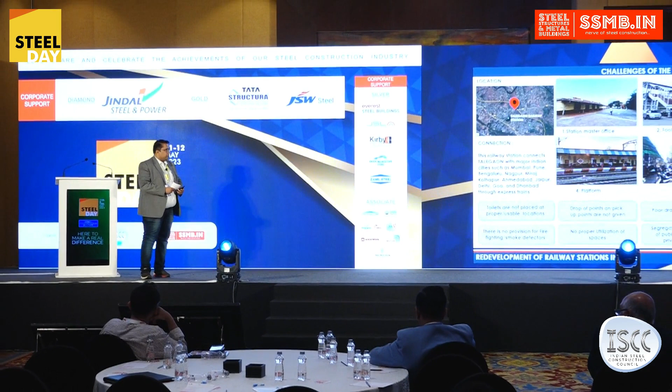So, Talegaon is one of the busiest stations in Pune. When we visited the station for site survey, we were pleasantly shocked to note that the railways themselves did not have the drawings of the station and needed us to survey the whole station area before we got started. The platforms and its buildings, as seen in the photographs, are dated and haphazardly developed.

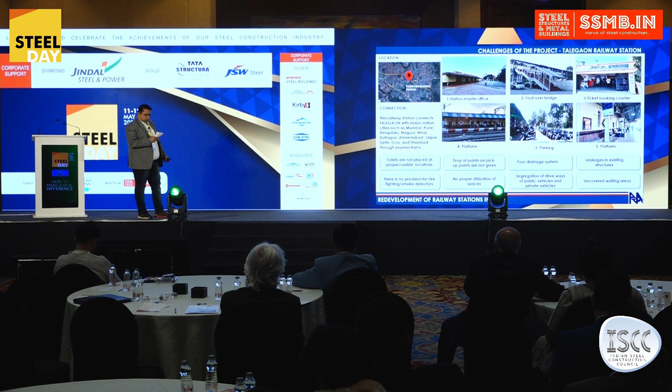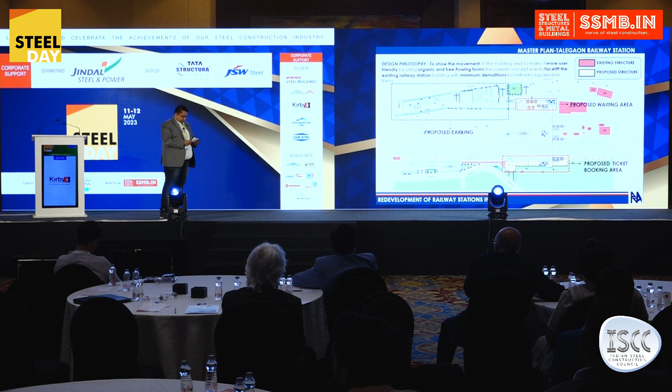So this is the first option that we proposed and presented to the railway team. A blend of flowing forms, new and dynamic materials, with a proper landscape that would complement and tackle the various greenhouse gases that will be released due to the continuous movement of vehicles and cabs and rickshaws, etc.

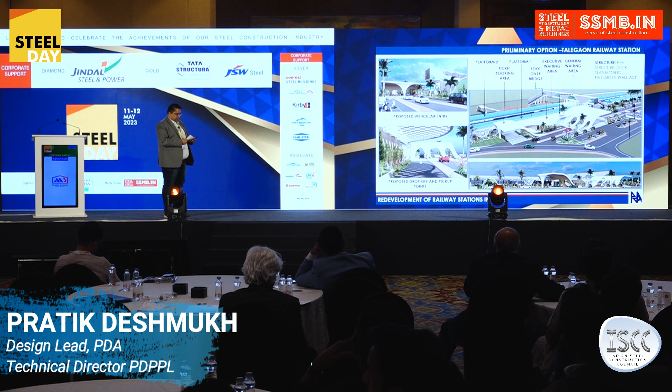We wanted to use the blend of various steel components to create a free-flowing design to change the myth that with steel, one cannot create dynamic forms. After the initial presentation, we were advised that we should stick to the DSR items and not have many non-standard or NS items. We were also informed that the space we were showing in the front where we have the access roads does not belong to the railways. So we had to rework the whole design again.

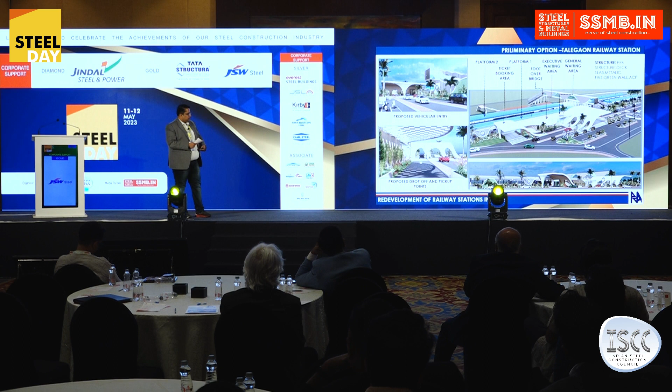So we went back and reworked the whole design with the compact space allotment that we had. And because of the timelines, the railway said that we want to finish these jobs before the next elections, which is about 8 months from today. So we went back to the conventional forms, where execution would have been much simpler and much easier.

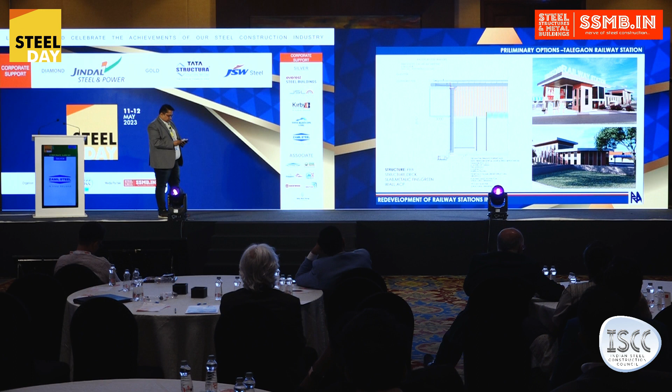Here we have used the primary steel for columns and beams. The facade, though depicting an RCC building, is in fact a combination of cement board cladding with texture plaster to mimic exposed brickwork. We have designed it as a double skin facade which connects to the roof plenum, which has turbo ventilators on the top that shall be used for heat dissipation.

The roof and the wall junctions are covered in ACP to facilitate maintenance of the gutters, as well as create an appealing box fascia for the building to cover the metal roof and its slope on the top.

6 minutes over. I'm just almost done.

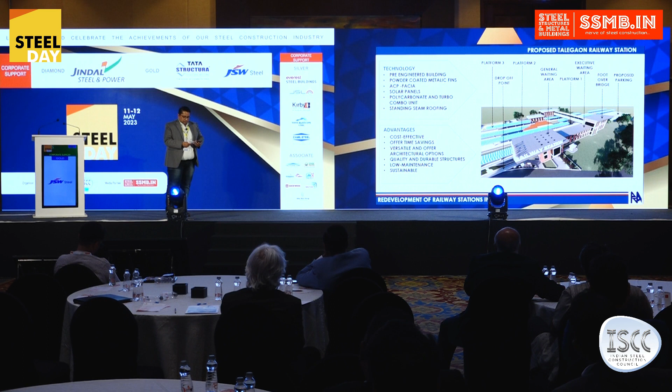Solar panels are also provided on all the parking structures, which are also in PEB. These are just some of the views of interiors that we have proposed. We have tried to use locally available material wherever possible.

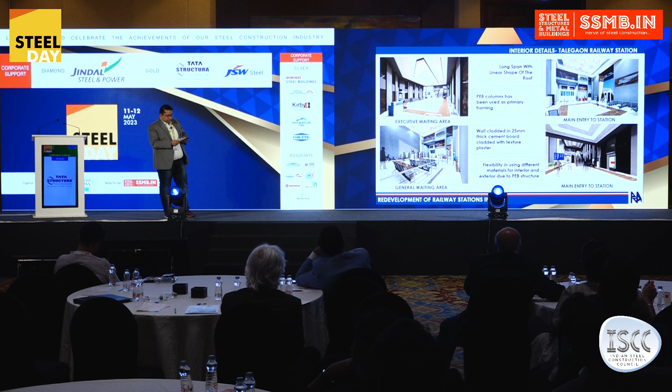The experience of working with railways was a mixed bag of pleasant surprises. On one hand, they need not be convinced about the use of steel in the building, but needed to be pleaded with for the aesthetic elements required to form a pleasing design. Despite all this, we are happy to contribute to the national growth and PM Modi's vision of Amrit Bharat.